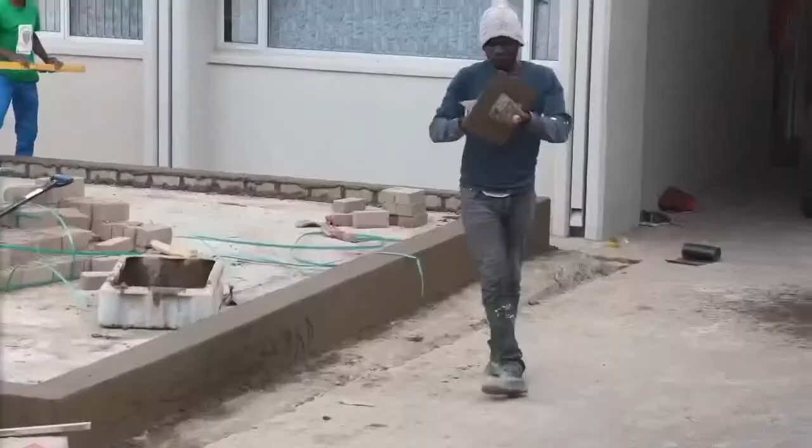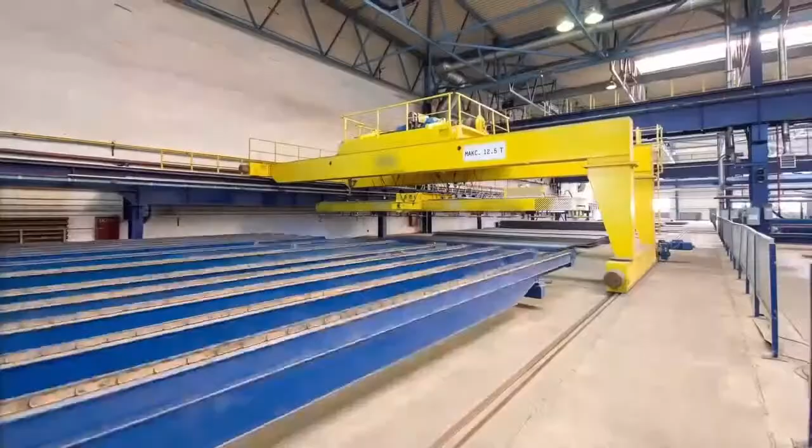Etopia build technology-led eco-buildings of the future that give back to our planet. Etopia is committed to teaching individuals around the world how to live more environmentally friendly and build sustainable communities. Etopia has developed new technologies and products, changing the approach to the built industry completely. Etopia plant trees to achieve a carbon neutral status. We are Etopia.

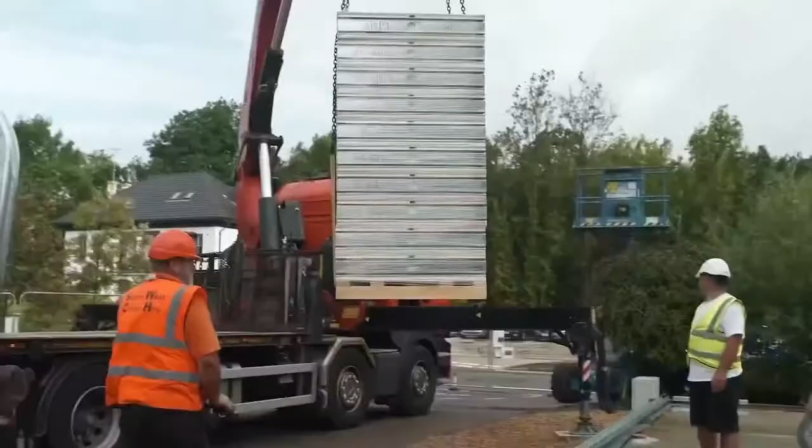My name is Rosanna Lawn and I'm the Brand and Strategic Partnerships Director at Project Etopia. I'm here to talk to you today about how Project Etopia as a company have innovated and partnered within the built environment and other industries to drive a message for sustainability and to create products that are available for not just ourselves but other developers in the industry who are looking to go net zero or start their journey on net zero, especially to align with the new future home standard and how we can really achieve that.

So my role at Etopia is quite dynamic. It's working across all of the business subsidiaries to align the message with policy, partnerships and the Sustainable Development Goals of the United Nations. And this is really to transform the way that people approach this subject. The company itself consists of 5 companies and I'm working across all of these in an advisory position with the CEOs on key strategy areas of the business, including launches of the companies, products, rebranding, messaging, and helping create their individual brands whilst ensuring that they all feed into the wider vision of Etopia Group.

So I have a background in development. I'm a chartered surveyor. I used to run an investment and development business in London. I have my own not-for-profit in the industry as well. And I've brought all of that knowledge of both technical understanding of the industry and my knowledge of building brands and business to really capitalise and maximise on what we do at Etopia and to try and debunk the confusing message that could come with all of the incredible things that we do here.

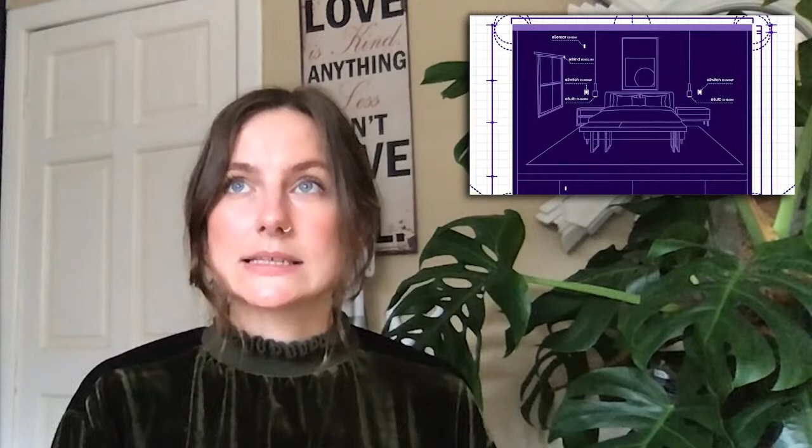And one of the key things that we realise is, and I believe this is part of the Future Home Standard too, and in fact I'm sure it is, around auto shading. So for instance, if you had a south-facing garden and you had a big window onto that garden, there's a high probability that there's going to be a lot of solar gain that comes through that.

Now, if you have your air source heat pump and your heating system set to 21 degrees, for instance, and you've got a lot of solar gain coming through the window, your air source heat pump is going to have to work a lot harder to maintain that temperature level. So what we've actually innovated is an autonomous blind that works with the sensors in your home that we've created, that works with your air source heat pump, that will talk to it and go, there's a lot of solar gain coming through at the moment.

We're also working with Samsung SmartThings. So not only have we got our 5 products, which are sensors, a hub, blinds, wireless light switches and our light bulbs, we also can tap into all of the lifestyle products of Samsung SmartThings, which is, if you have a Bose speaker or an Alexa or something like that, you can start really controlling not just the energy of your home, but also your convenience and your lifestyle from a singular app.

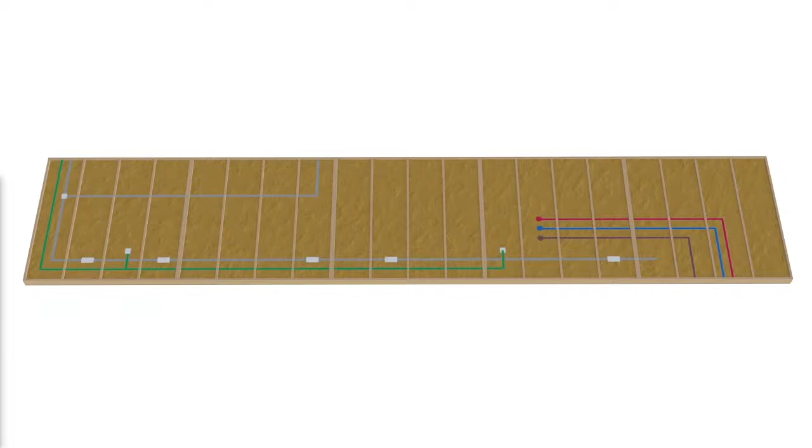By moving this layer to the outside of the structural panel, all building services within each module can then be factory fitted, and the requirement to provide individual airtight seals and fit them on site is more or less eliminated. This robust, fully adhered membrane protects the pods during transportation and is more resistant to damage, which can reduce or eliminate the need to use additional single-use plastics during transportation.

The airtight layer also wraps each pod to form an efficient, vapour-permeable bubble, meaning the subsequent assembly of the modules on site can also be simplified. Seals at expansion joints and between modules are made using the same tapes and membranes as those used in the factory, reducing the need to source a variety of different specifications of each component.

The reduced air leakage rates can reduce the thickness of insulation panels required, in turn reducing the thickness of components across the entire facade assembly, from mounting brackets to window flashings. The use of site-applied seals such as EPDM can also be reduced.

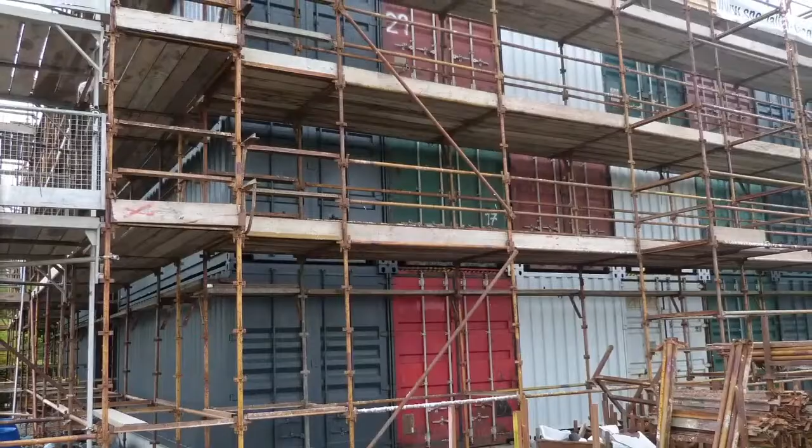Another type of volumetric approach was taken on the District 10 project in Dundee, Scotland, where steel shipping containers were upcycled into an office development. The steel containers were lined with timber framing and Spacetherm aerogel insulation used to limit cold bridging. Careful hygrothermal analysis was also undertaken to ensure condensation risks were mitigated with the impermeable steel shells. These container pods were then assembled into the finished structure, with each container pod forming a fully self-contained office aimed at start-up businesses in the city.

In both these types of construction, managing the balance of physical properties and hygrothermal effects is key to realising the full potential of these systems, and in turn to maximising progress towards net zero carbon. Gaining the full benefit, however, requires all parties involved to know what effect each step of the process has on the other, and is where we as product manufacturers can play an important role.

Of the many shifts and changes the industry has witnessed over the past year, one of the few positive changes is increased adoption of various tools to facilitate online collaboration between all parts of the industry, not just individual design teams. Whilst this has been by necessity, it has undoubtedly made it easier to get everyone involved in a process around the table, to discuss and resolve issues more quickly. The ability of various parties to drop into design discussions and review details at comparatively short notice helps reduce delays.

Equally, being able to conduct virtual training with site operatives based on up-to-the-minute design strategies discussed with specification teams on that same day ensures everyone shares an understanding of what is required of them. As a company, we've been conducting online CPDs and toolbox talks with specifiers and contractors since the first lockdown began over a year ago, and going forward we anticipate this becoming an integral part of our workflow. The experience we've gained allows this communication between ourselves and specifiers and installers of our products to happen seamlessly, and by construction industry standards almost instantly.

In this example here, by dropping into the design team meetings, we were able to reconfigure the location of the air barrier layer from a traditional internal vapour control layer based system to an external air barrier. This not only simplified the internal fit-out, but allowed the use of a lower design air leakage rate, in turn allowing the thickness of the external insulation layers to be reduced.

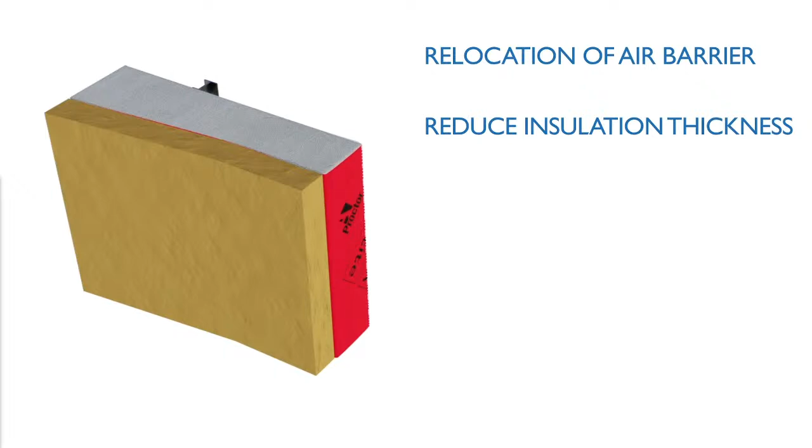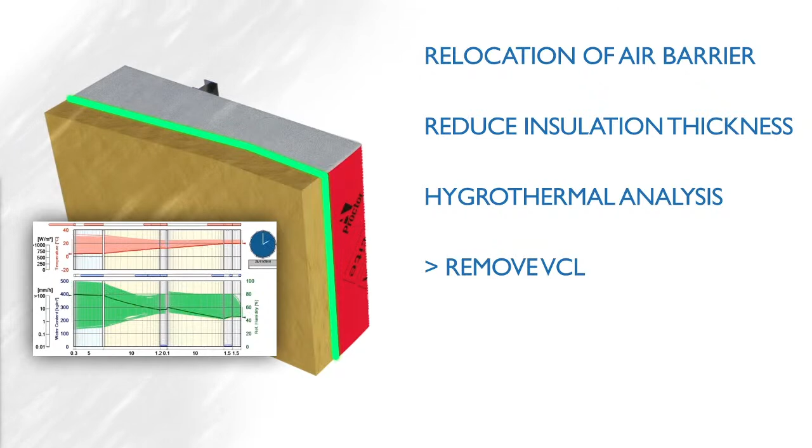Because the air barrier is vapour permeable, it was able to be positioned between the internal and external insulation layers without compromising the hygrothermal performance and trapping any moisture. We could then confirm the suitability of this configuration via dynamic moisture assessment of the assembly, showing no risk of condensation occurring, even in this specific case, without the use of a dedicated vapour control layer.

After being able to quickly discuss the design stage effect with the architects, we were then able to follow this up with the cladding contractors, confirming that the bracket and support frame dimensions and window flashing specification could be reduced, bringing down the overall wall thickness.

In addition, we were also able to advise on upgrading the reveal insulation using our Spacetherm Slentex A2 system, reducing the cold bridging effect around the window reveals and further improving the efficiency of the envelope, offsetting the cost of this upgrade with savings across the entire facade system.

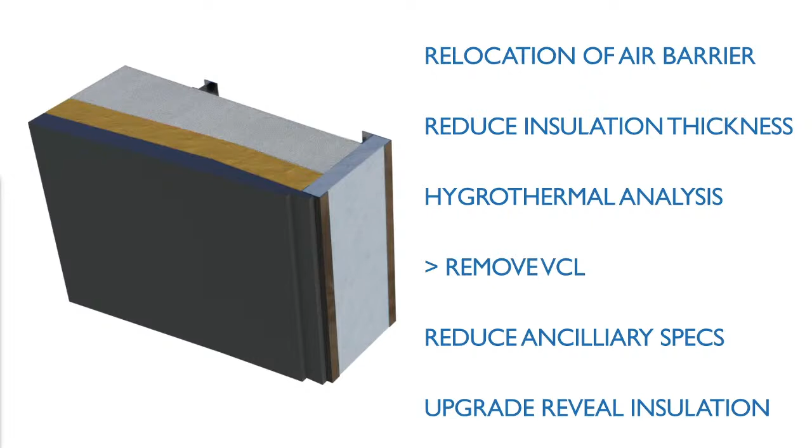Even just considering this one small area, the ability to rapidly discuss and evaluate multiple options brought about a thinner and higher performance thermal envelope, with a reduction in cost. Developing this approach across the entirety of the building design process is going to be a key element in reaching net zero. Going forward, it is also an approach that we as a company intend to continue to develop, even as life and work returns to normal.

So now let's move on to the Q&A session.